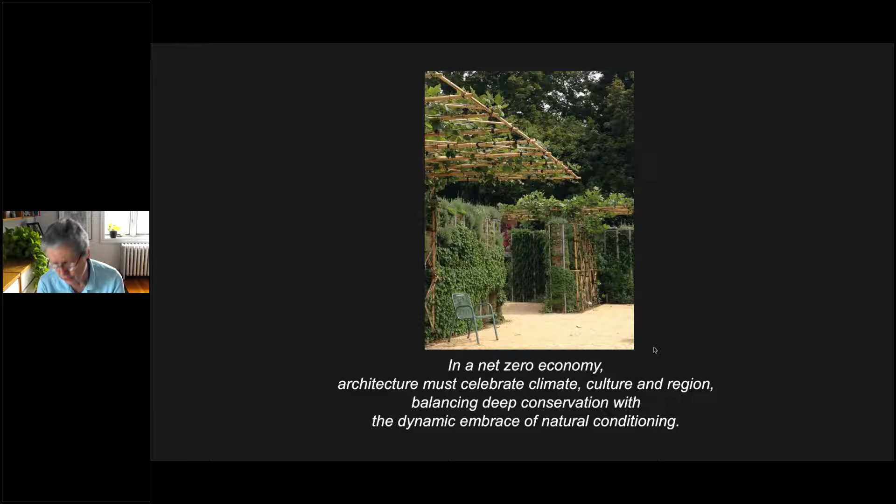These buildings lock in a chemical soup of materials and occupant activities with serious consequences for human health, from asthma to skin and eye irritations to reproductive health to cancer. And as all of you know, this has been untenable during the pandemic as a place to go to work.

Sealed and windowless work and living environments lock out the natural conditioning resources of passive solar heating, of daylighting, of natural ventilation, of passive cooling. These are nature's renewables, and they are the centerpiece of human health and environmental resiliency.

So I want to introduce each of them one by one. When we design for environmental surfing, we will maximize natural conditioning for as many hours and days and months as possible. This will be unique to each climate.

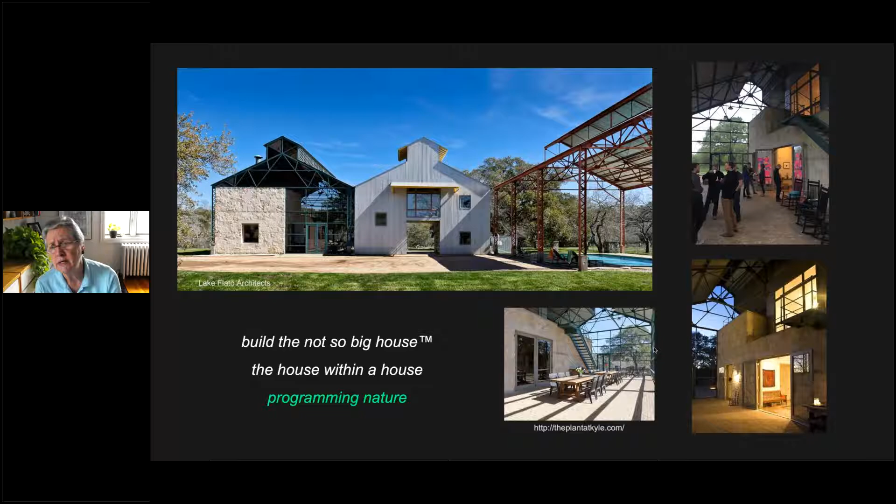It is a residential home with a pool and a dorm, so you can invite a lot of friends, and then the core house itself. Really an interesting approach to zoned conditioning instead of conditioning all spaces to the same level.

If we're going to do natural conditioning, we want to first design the core house for the climate that it's in. That means that if it's a very harsh climate, we're going to design it with a lot of buffer between us and the outdoors. But if it's in a very benign climate, like Hawaii, we're going to design it with a lot of outdoor living. And of course, most climates are something in between.

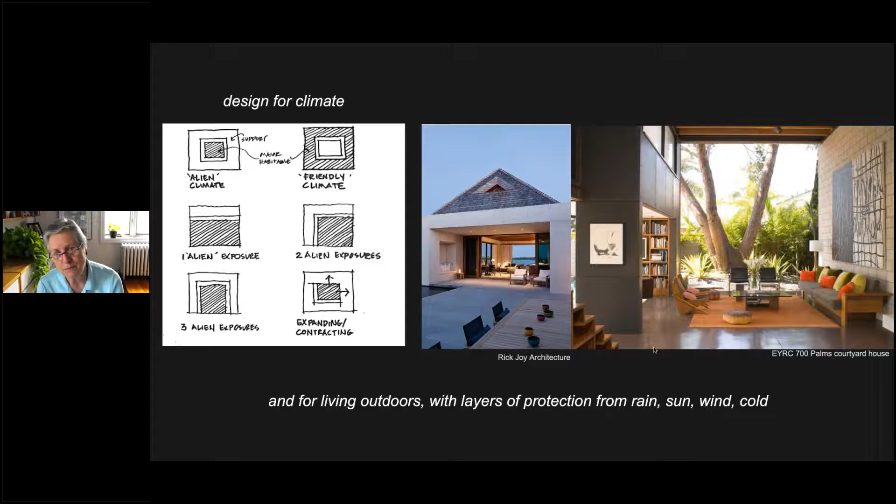So what we need to design is houses that expand and contract, or living spaces that expand and contract, where you basically have a core that you condition well, and expanding spaces that become a perfect spring space, a perfect summer, a perfect winter space with extended living. This project by Rick Joy gives you a sense of how beautiful these expanding, contracting living spaces can be. I fundamentally believe we should start taking every house program and breaking it into the parts that need to be conditioned versus the parts that may not need to be conditioned.

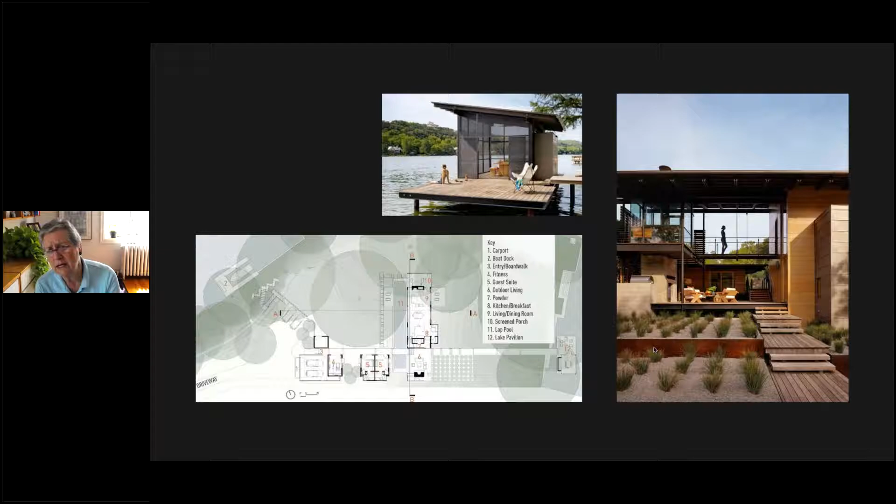We clearly will want to, in the harshest winter or summer days, have our living room, our bedrooms, our kitchen maybe, and some level of dining conditioned. But there are lots of other days where we want to actually extend outdoors into the landscape. So if we can start to think about how we design houses to embrace nature, maybe not in every room but in the majority of rooms, we've already done a huge thing towards resiliency and low energy.

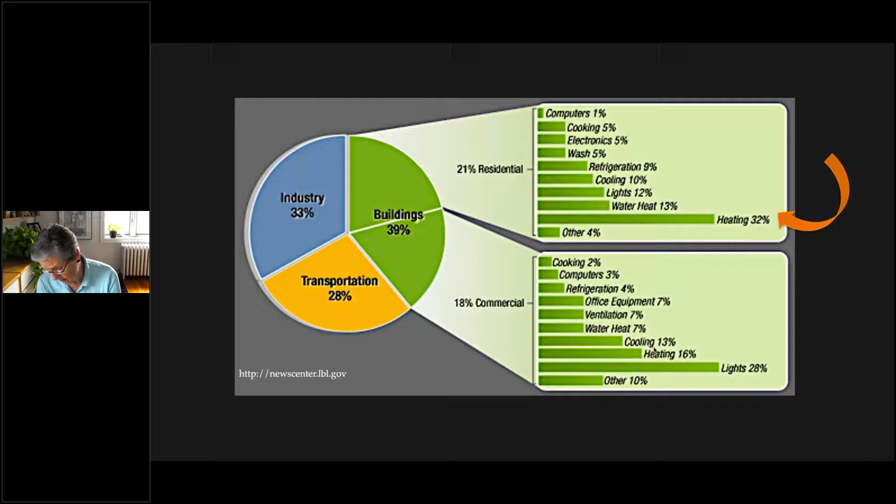Most people think the biggest challenge we have in energy is air conditioning. It is not. By far and above, the largest energy consumption in residential buildings is for heating, followed by water heating, then lighting, then cooling. So for us to turn all of our designs around as if cooling was the dominant force is losing out on the most critical free heat that we should environmentally surf for, which is solar energy.

Net zero buildings will free roll. They'll essentially, for 25 to 75% of the wintertime, have the heating system off. And for those of you with smart thermostats, you know the system just turns off as soon as the thermostat's temperature is met. If it's a sunny room that the thermostat is in, it'll turn off pretty quickly during the day. In fact, in my house, I usually have 15-minute cycles before the sun comes in which the heating system will turn on in the dead of winter.

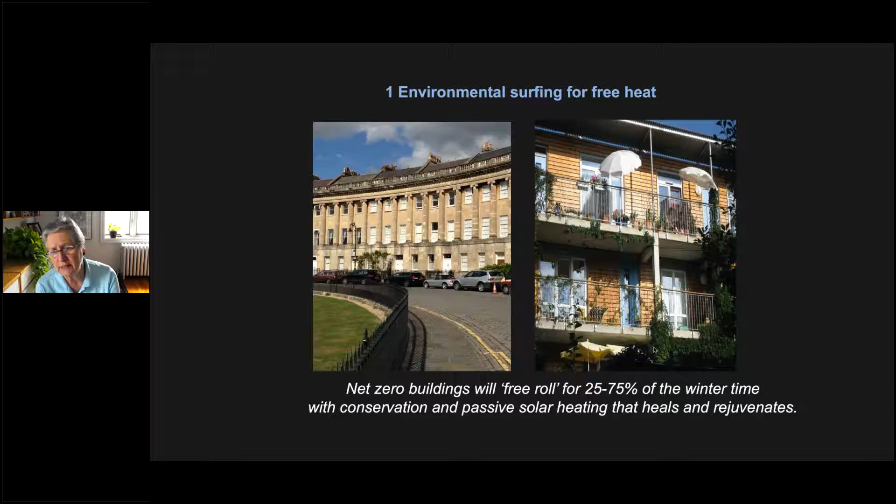If we do deep conservation, so passive house standards and passive solar, we can pretty much meet 75% of those large heating loads that we see across America. This is for commercial buildings, but it's very similar for residential. This is what we use and when we use heating, and the system is off from early May or mid-May until early September.

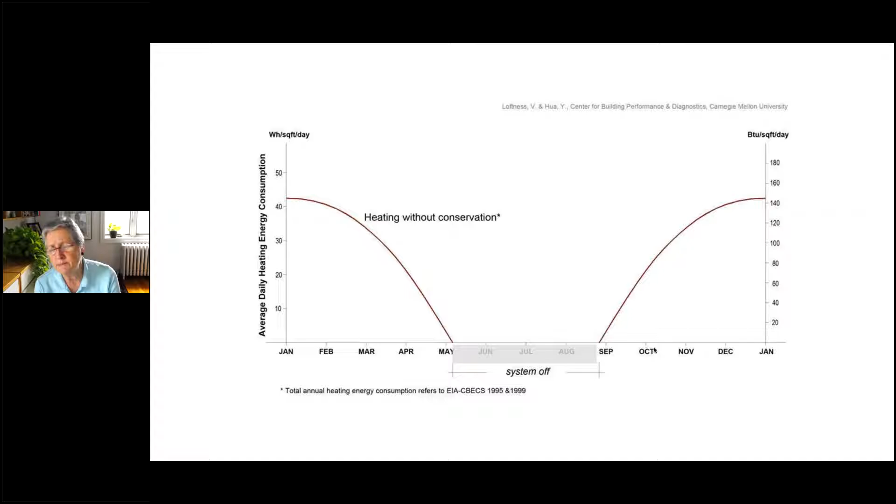If we do deep conservation, if we start to go towards passive house standards, we can turn the system off all the way from the end of March till the middle of October. And if we do that with passive solar contributions, we can get our heating down to 3 or 4 months. This is a dramatic reduction in the time in which we need to turn on the heating system.

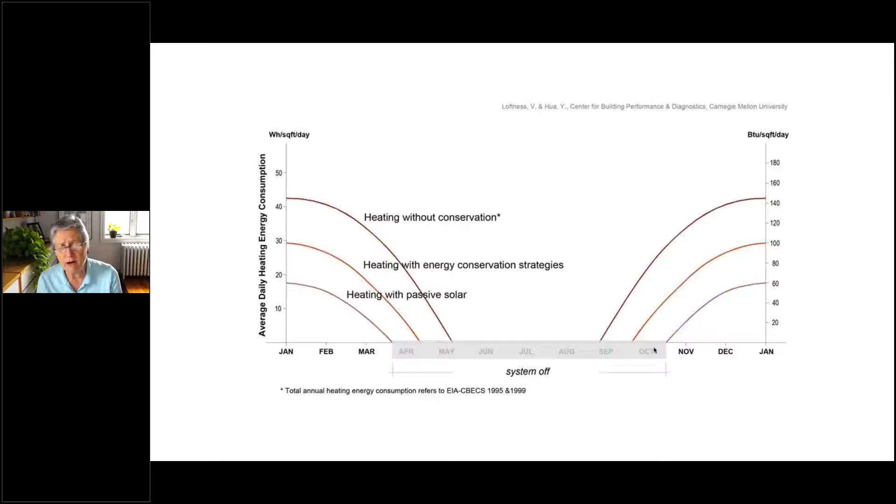It also is a time of resiliency. If the power went off anytime between the end of March and the beginning of November, I would be fine in my house if it was designed with conservation and passive solar.

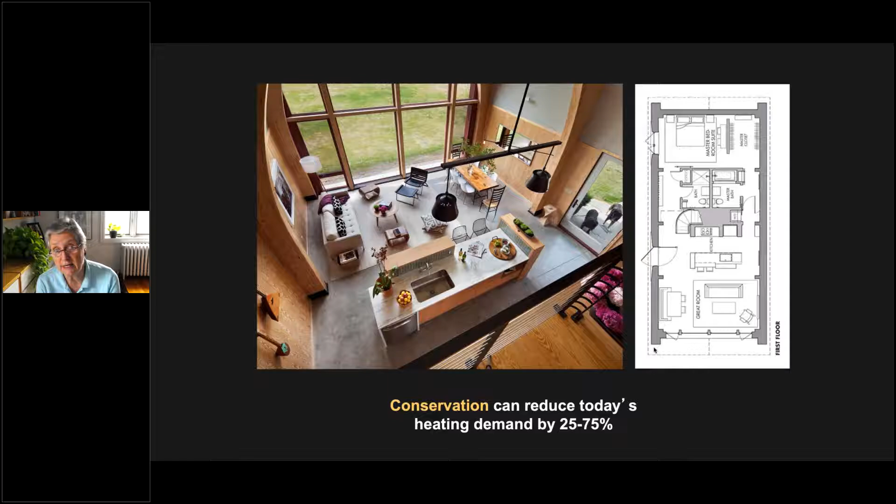If you want to look at houses designed around this, here's an example of a project in which the houses are super, super insulated. The windows are incredibly high performance, and it's very airtight. This is a house designed by Dennis Wedlick in upstate New York. It meets the Passive House US standard.

You can see the thickness of the walls, and you can see the attention to solar energy because the glazed facade is facing south. This house essentially uses a small percentage of what you would have in any typical house in upstate New York, but it has a much higher quality of life, and it literally is resilient. You could pretty much survive in this house with the power going out for a full year. It would get a little chilly in the winter, might get a little warm in the summer, but you would be fine.

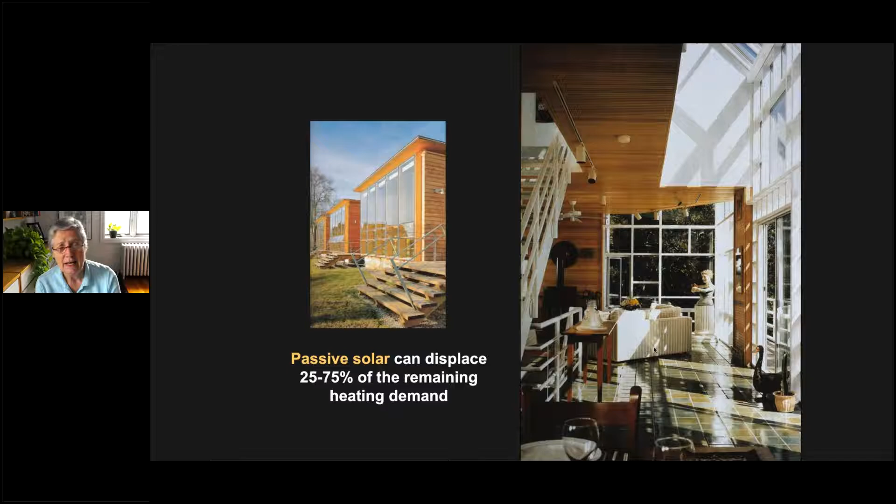Passive solar can displace somewhere between 25 and 75% of the remaining heating demand after we do deep conservation. That percentage range depends on whether you're in a sunny climate and how cold the climate is. If you're in a milder climate, you can meet the 75% with a lot of sun. And if you're in a harsh climate, you may only meet 25% of the load, but that is still a significant contribution.

The other value of sunshine is that it turns out to be a great sterilizer. It actually improves human health. There are studies done all over the world now to look at what value we have when sunshine actually hits the human body and hits the surfaces that we live next to.

This study by Choi in Korea looked at hospital rooms with sunshine and hospital rooms without sunshine, and found a 41% reduction in length of stay among gynecology patients and a 26% reduction among surgery ward patients when they were in the sunny rooms.

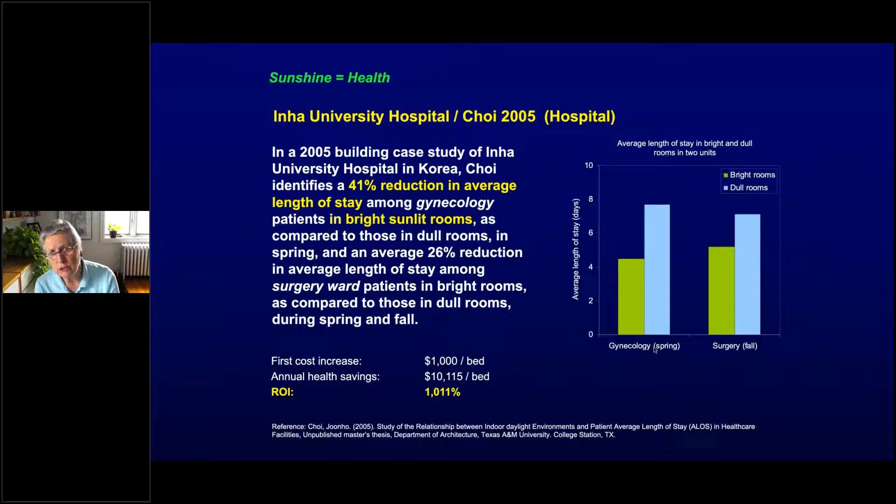Sunshine is a cure. It has a huge emotional and physiological benefit to people. So designing around sun is really a wonderful strategy. It also is a good sales strategy.

The second thing I want every home to do is to environmentally surf for light. It used to be that our rooms would borrow light from outdoors through transoms or from adjacent corridors through smoky glass doors, and now we just basically turn on electric lights. We need to design every room to use daylight.

Net zero buildings will be designed for daylighting as the dominant light source, and we will then rediscover the engineering and art of effective daylight design.

The church on the left is a Baroque church in Central Europe. It has no electric lights on. It predates electric lighting, and yet for the entire day, even in a very overcast environment, through very small apertures, it has incredibly effective daylight.

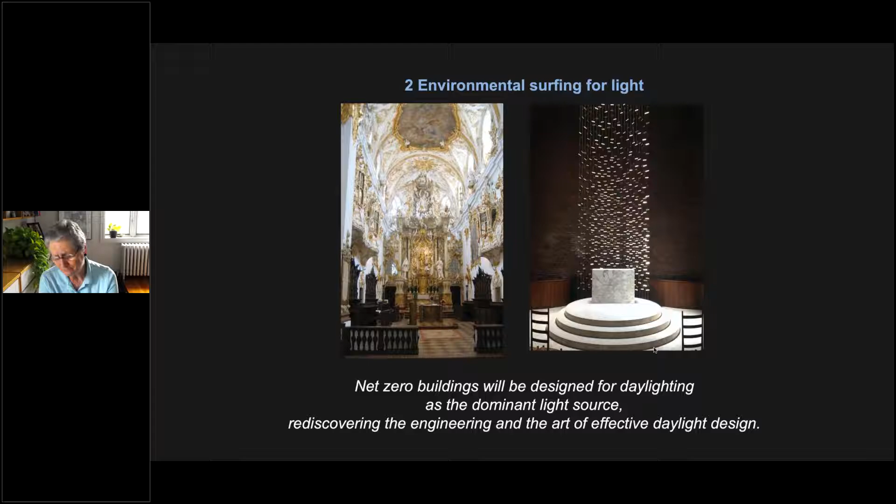The church on the right is on MIT's campus. It's an Eero Saarinen project, and it is a top-lit altar that's totally a daylit altar. And the spectacular nature of that daylight is magical.

This is how much lighting we use. Truly in residential homes, we use a lot of light as well. And there's still a pretty significant amount of incandescent and compact fluorescent light bulbs in our existing homes, and hopefully no more in our new homes.

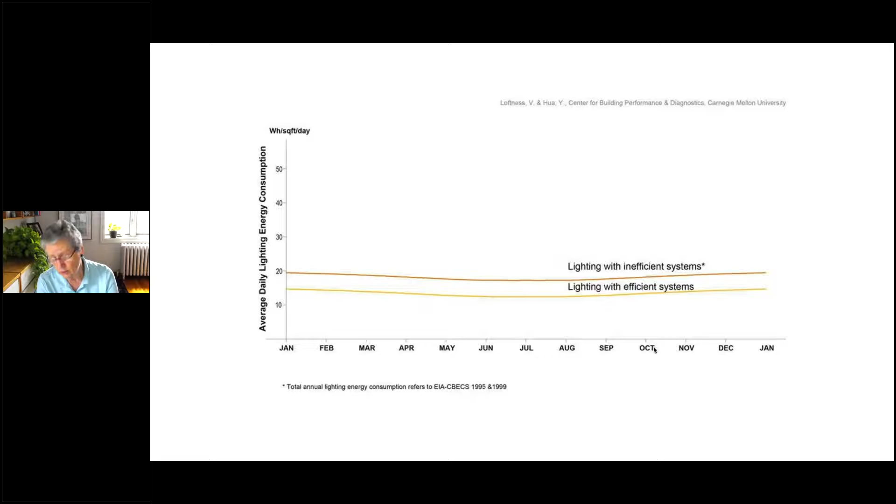Once we get lighting with more efficient lamp sources in them, we can cut the lighting loads by at least 30%, and in many cases more than 50%. But it's when we design around daylight that we start to see dramatic reductions in the lighting energy demands.

And when the buildings are narrow enough and every room has a window or a borrowed light window, all of a sudden the system can be off. You can occupy every room in your house when the power goes out during the daytime because daylight is there. It is a free energy source and it's abundant.

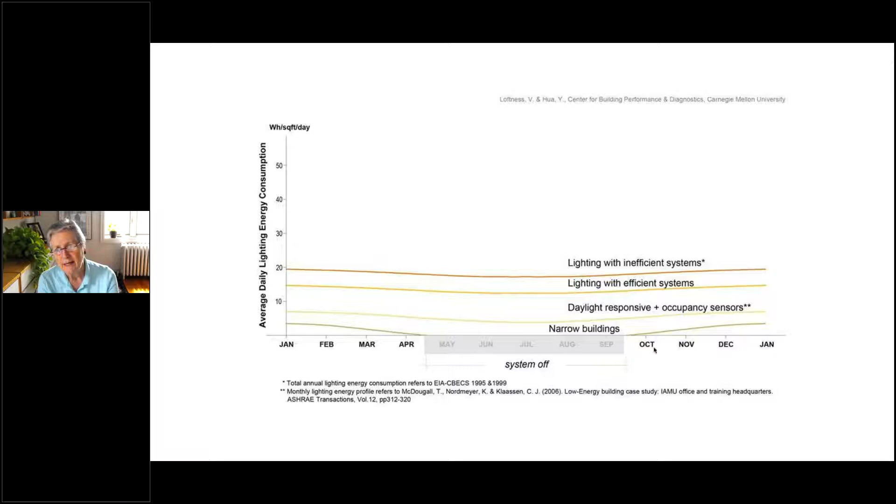And it also is a great sales reason. Nothing is more spectacular than walking into a room where daylight washes across natural wood and gives you this incredibly engaging sense of being part of nature.

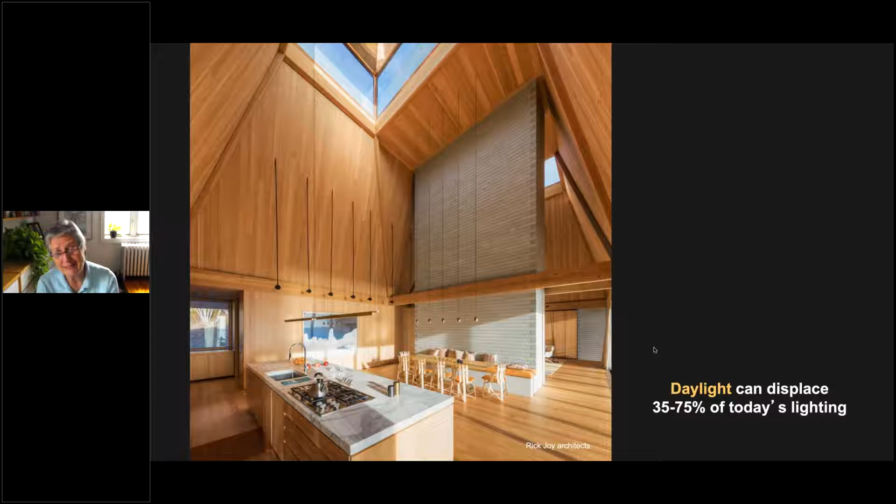Daylight can displace somewhere between 35 and 75% of today's lighting. That doesn't mean we won't have lighting. We'll come back to that.

In addition to the value of a daylit space, let me close the window, one minute. It's the one reason I have to close windows, right? Acoustics. Well, maybe when it's a little too hot, but right now it's really nice.

It turns out that daylight is critical to our sleep. A lot of the research has been going on at the Lighting Research Center in upstate New York at RPI, trying to understand how important early morning blue light and late afternoon red light, called circadian light, is to our circadian clock and our natural production of serotonin, a natural hormone that makes us alert in the morning, and melatonin, a natural hormone that makes us sleep at night. And it turns out it's critical.

We need actually the light variability that daylight alone offers us. Now we can artificially create blue light in the morning and red light in the afternoon, but if we've got daylight, why not just let daylight be our natural clock?

It turns out that for children who were put into orange glasses that cut out the circadian content of daylight in their classrooms, they had trouble falling asleep typically somewhere between 40 minutes and an hour and a half later than their peers who were not wearing orange glasses. Just getting light into our pupils is critical for our ability to fall asleep.

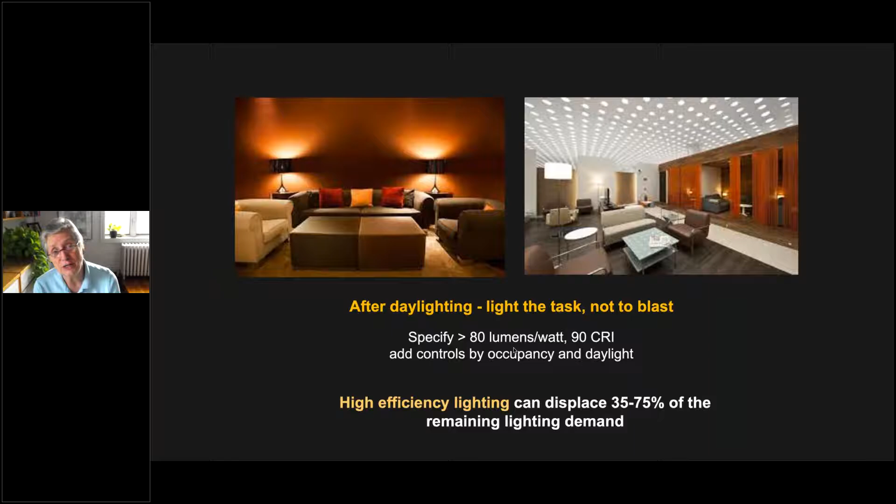After daylight, we've got to get the electric lights correct. We need to be much more critical to light the task and not blast light, and specify lamps with incredible efficiency—at least 80 lumens per watt or more. We need lamps with incredible color rendition, like 90 to 100 CRI, and provide controls that are occupancy driven and daylight driven so we're not overlighting spaces that daylight is already lighting for us for free. High efficiency lighting can displace 35 to 75% of the remaining lighting demand. So design for daylight, then design for very efficient and enhancing electric light.

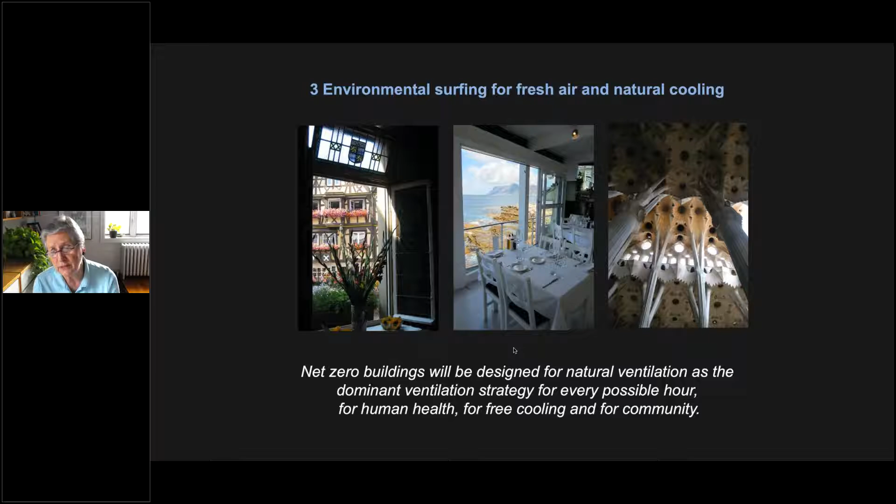The third environmental surfing goal is to surf for fresh air and natural cooling. Net zero buildings will have to rely on natural ventilation as the dominant ventilation strategy for every possible hour we can, to enhance human health, provide free cooling, and ensure we have connection to our own communities. Because if we design our buildings sealed, we lose that connection.

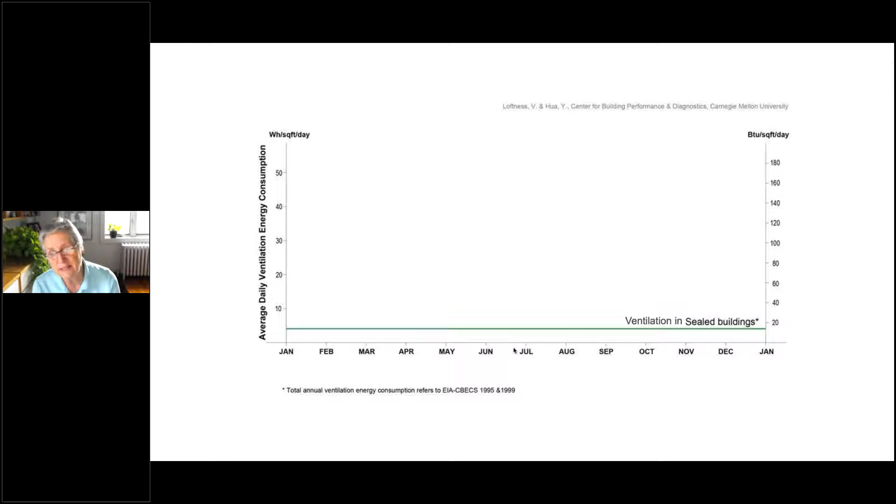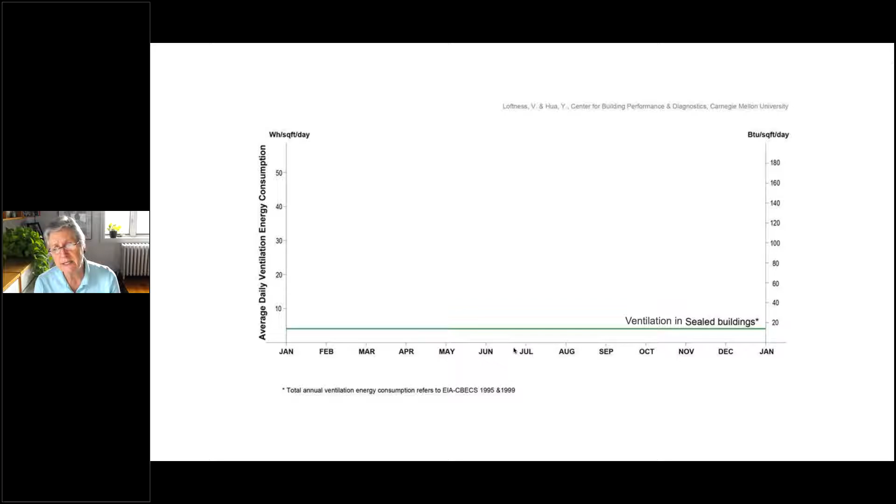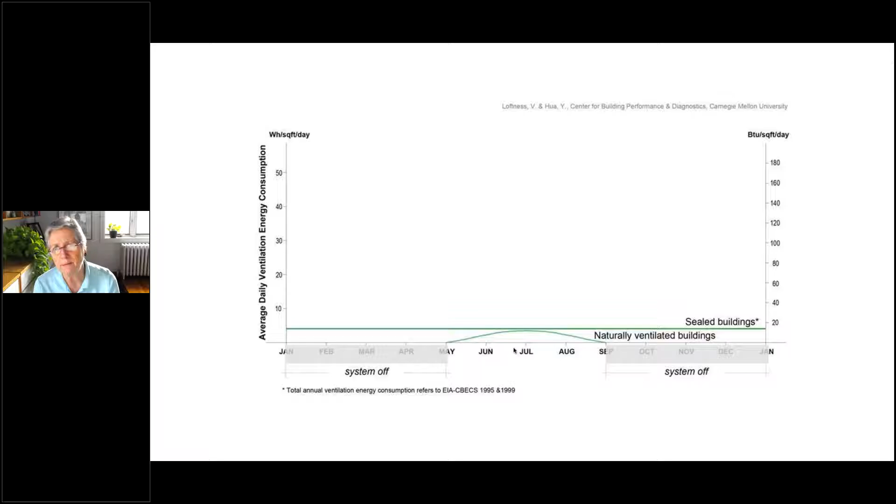For commercial buildings, ventilation is a relatively flat, consistent load that goes on all year round. For residential buildings, we've never had a tradition of forced ventilation systems, but as our buildings get tighter, codes are going to mandate that we install them, and the tendency will be to make sure they run year round. If we really can design to allow natural ventilation to pick up the moderate seasons, not the very hot summer, we'd be perfectly resilient from September through May. We'd probably need a mechanical strategy in summer because it just comes with too much heat and humidity.

Matched up to ventilation is your cooling demands. Air conditioning loads in some climates will run all year round, and in most climates it will pick up in May and go on till September.

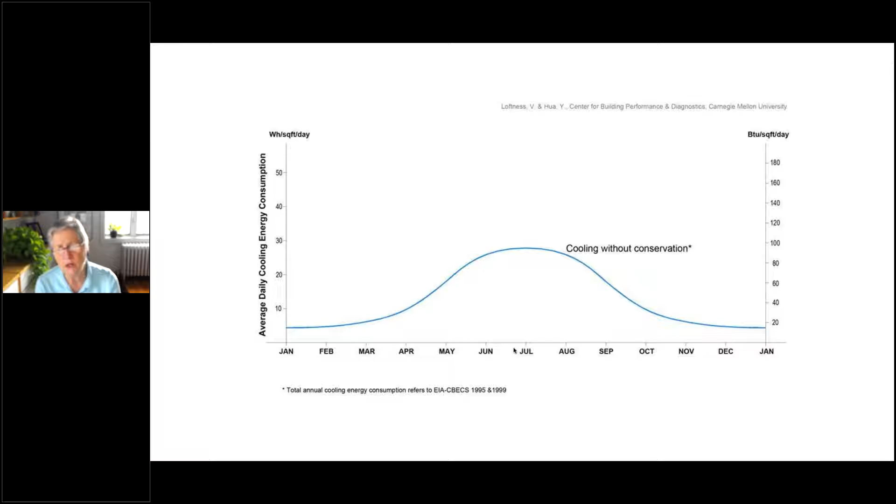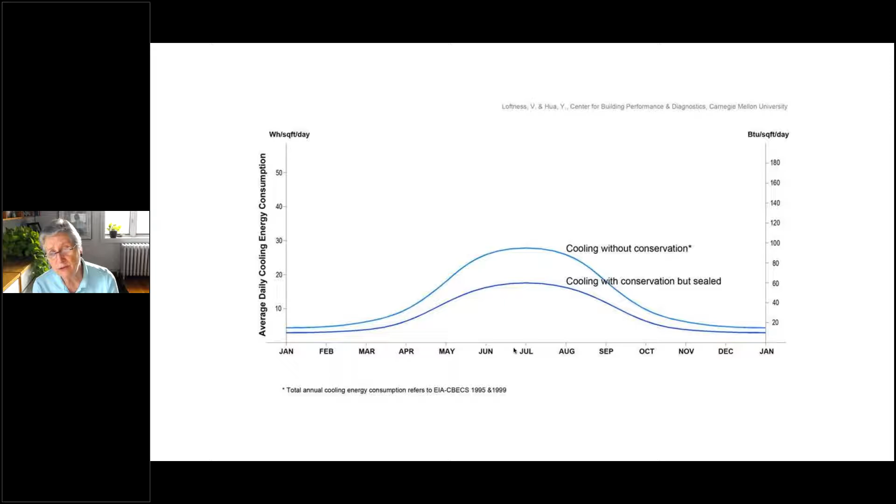If you design with conservation—shading your buildings, insulating, putting in the right roofing materials for reflectivity—but keep it sealed, you're going to be running all year round. You're just going to be using 30 to 40% less, which is good. Conservation is the first step.

But if we design to turn over the management of the building to natural ventilation through a mixed mode system, this means the mechanical system is designed to turn off when the natural system is capable of picking up the load. For those in the mechanical world, that could be an economizer cycle if we run it through the mechanical system. For those of us in residential homes, it could be just opening the window on a beautiful day.

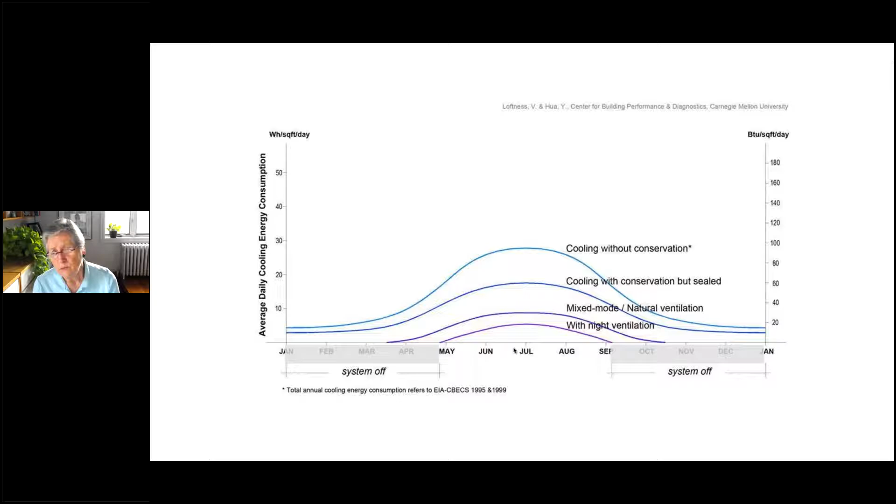If we do that with night ventilation, because night temperatures in many parts of the US are significantly cooler than daytime temperatures, we can get the value of free cooling and reduce the need for air conditioning during the daytime. So let's start with the conservation.

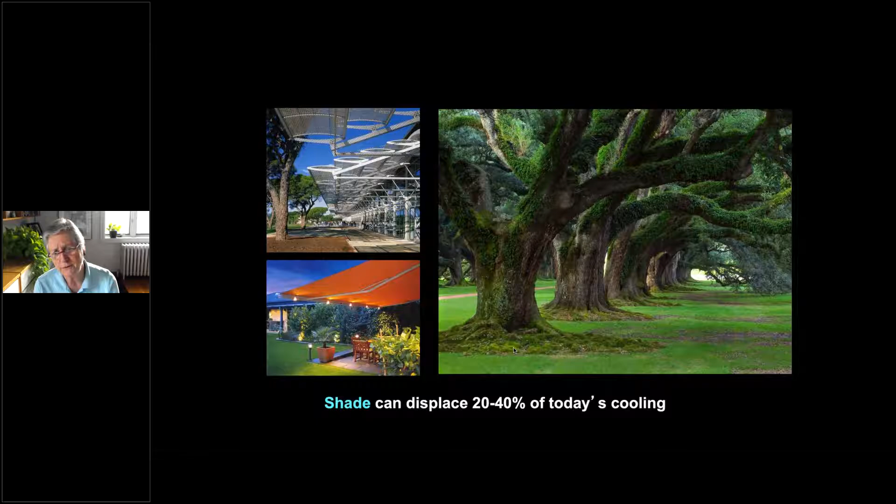The very first most important thing to do is to shade. We've got to shade every window, our roof decks, and our outdoor spaces because it's getting hotter. The sun is intense, and hard surfaces are very absorbent, putting a lot of heat into the atmosphere—we are part of the problem for why it's 2 degrees or getting closer to 2 degrees increase in outdoor temperature. Shading can be everything from trees and vegetation to overhangs to canvas awnings. Everything you can incorporate into your designs for shading, including internal shades on some sort of PV automation, is absolutely invaluable to reducing our air conditioning loads and providing comfort.

Sadly, at the moment, our homes are very poorly shaded and becoming increasingly sealed. I see far more sealed sash windows going into residential homes with very small operable components on the side just to meet code. That's the antithesis of what we want to do. We want large operable components so we can live outdoors and enjoy a breeze at night.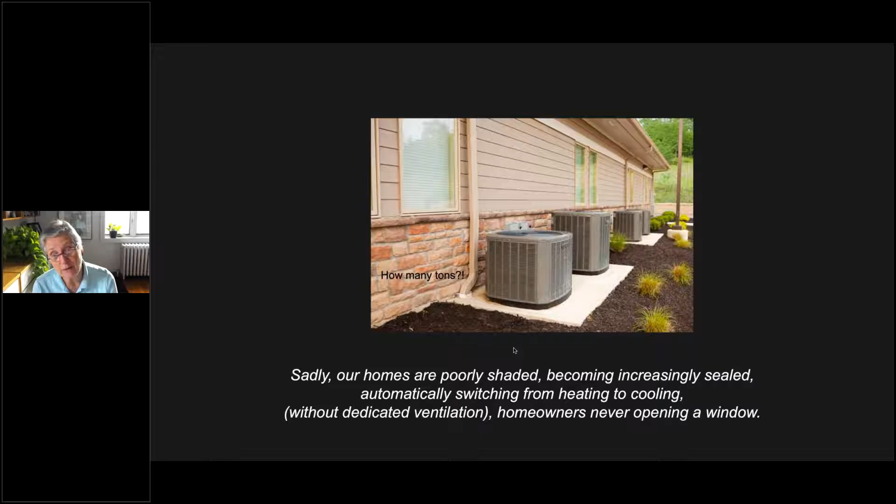I live in a home where my dining room looks like this - I can open the entire wall of my dining room. I don't have a nano wall, which is probably the most elegant solution, but I do have French doors from Pella, which are breathtaking on a beautiful day. Every morning pretty much is beautiful in Pittsburgh - it gets hot in the afternoon, but mornings are perfect. So we open up and sit essentially as if we're outside, or in some cases we just move outside.

Natural ventilation can displace somewhere between 20 to 40% of the cooling load. I wouldn't need to air condition until about 10 or 11 a.m. in Pittsburgh, and then I can turn it off again at about 8 p.m. And it displaces 70% of any ventilation requirement if we start to ventilate all of our new homes.

Does it matter to our health? Yes - there's a lot of research showing that people who work and live in naturally ventilated environments have much less absenteeism and far fewer doctor visits - like 16% fewer. They have a 35% reduction in hospital stays. This is a big deal, it makes a huge difference. And all of us now in the COVID era have begun to realize that natural ventilation, through dilution, is one of the ways we can reduce exposure to infectious diseases.

One or two other ideas I want to put in front of you in terms of environmental surfing that are very climate specific. For dry climates, on the left, is the use of night cooling and thermal mass. For diurnal climates is the use of earth cooling. Both cool nights and cool earth are incredibly important strategies for reducing our exposure to high and low temperatures, using nature as a natural conditioning system.

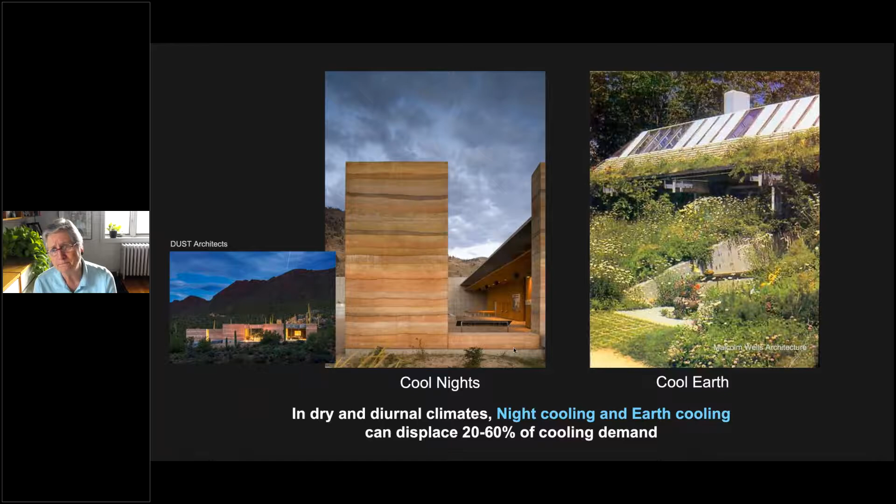Windows matter. Really, anybody in the passive house community knows that the first thing you do is specify the windows - they have the longest lead time, and they're the most critical decision you make. You want the highest R-value you can afford, and you want to make sure the windows are designed to connect you to outdoor rooms.

I want high solar transmission glass. I have an ongoing debate with the EPA folks who keep putting out standards pushing low solar transmission for anything but northern climates. I'd argue that even in Texas, you're going to want that sun in December, January, and February. So I want high solar transmission on the south, but low solar transmission on the east and west, because those are very problematic, summer-intensive suns.

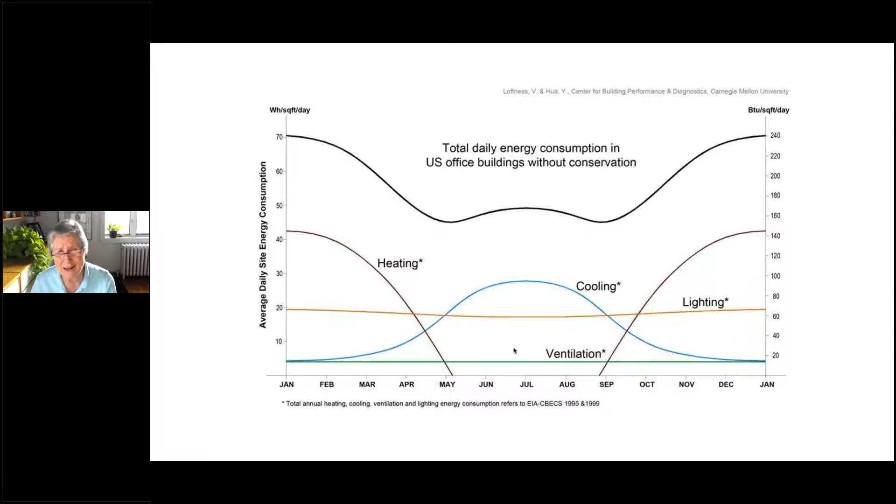We're using a lot of energy. We use it to heat, to cool, to light, to ventilate. This is our conditioning energy. I'll come back to plugs in a minute. And this is where we could be if we just did environmental surfing, deep conservation, passive conditioning, or environmental surfing for heat, light, air, natural connections. We can bring it down to this level.

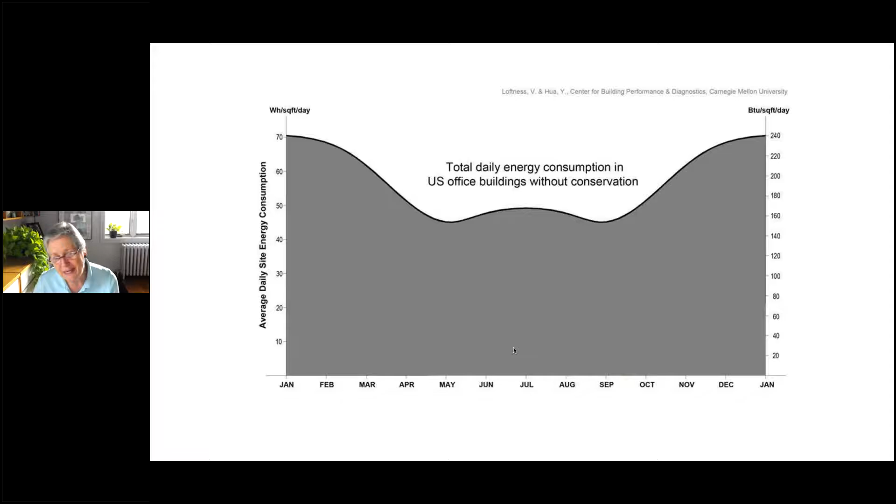In most cases, we do connect to the grid. We don't battery store it in the house itself. So we use the grid as our backup, but we're essentially achieving net zero. And the more the residential community can achieve net zero... the residential community is 20% of the total US carbon problem. And if we could get our new construction to net zero, we could easily get down to 10% of the US carbon. We could take 10% out of the equation through residential investment alone.

But wait, I need to talk about the plug loads, because this house here can be net zero unless people start to put a lot of energy intensive technologies inside. So we've got to pick our technologies and our control systems to be low energy, to be able to be supported by a small generator backup. So we have a core plan for when the power goes out after a major hurricane, we can run all of our core services and know exactly what those are.

And they're typically going to be your refrigerators. They may be your cooking. They may be communication. So we're literally starting to look at what's our core and how efficient can we go. We absolutely need to specify Energy Star for all appliances. We need to have a handle on plug loads, and we need to embrace innovative control.

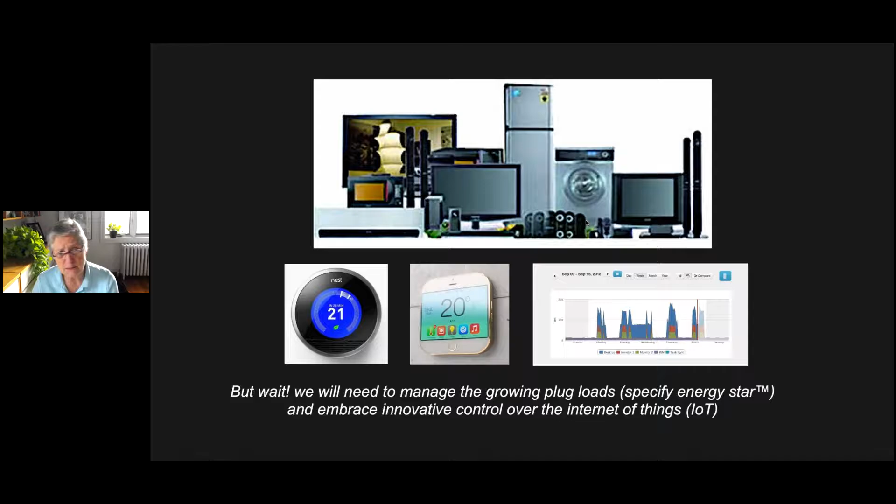I want to end with a few other things that we can environmentally surf for besides heat, light, air, cools, and power. We can environmentally surf for water. Residential homes have the potential to eliminate the use of potable water for landscape. But to do that, we have to actually capture site water and roof water and store it for landscape, and we have to design landscapes that use much less water, that are indigenous to the region they're in.

So if you as a building owner, designer, and developer start to think about collecting all the water on the hard surfaces on the site and on the roofs and finding a way to store it, then trickle feed the landscape and choose landscape that has very low water demands in that region, you can actually eliminate 50% of the water demand in America's homes used for landscape irrigation, at least in Denver, as an example.

We can also regenerate our water supplies, because what we're doing is infiltrating the rain back into the natural aquifer, rather than running it off into some storm sewer and having to take it back to be processed in a water processing system.

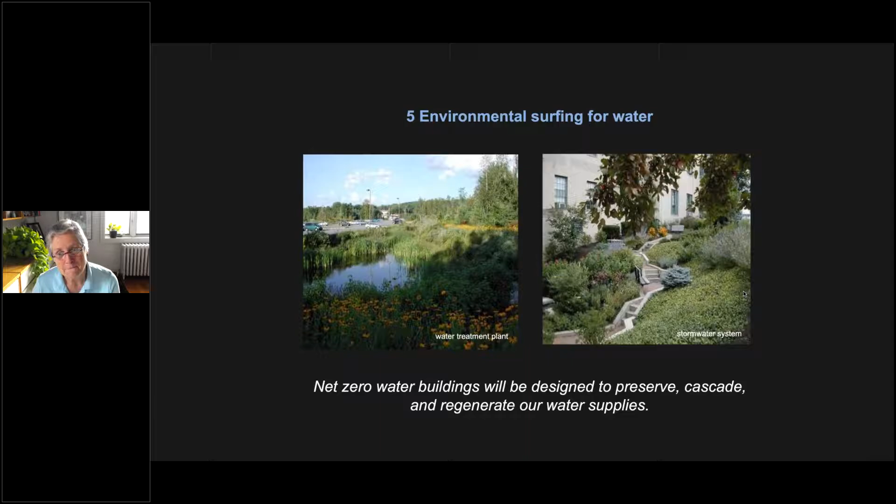Rainwater regeneration can displace somewhere between 20 to 60% of today's processed water. We still need potable processed water for drinking and cooking, but not for a lot of other things. We can use gray water and or rainwater for a lot of things we're using processed or potable water for, and it makes for far more beautiful side yards and sidewalks.

There are entire neighborhoods designed around water. Dockside Green in Victoria, Canada, is the most beautiful residential neighborhood I've ever visited, where all the rainwater and gray water are managed on site through a sewer system that serves an entire region. They got their housing development redistricted as a sewage destination and got the city to invest in all the water infrastructure because they manage sewer for a much larger catchment area. They do gray water, rainwater, and black water management in a beautifully articulated set of canals directly adjacent to people's terraces. It's a community that realized by becoming the water, sewer, and waste heating authority, that's how they paid for the quality of physical space.

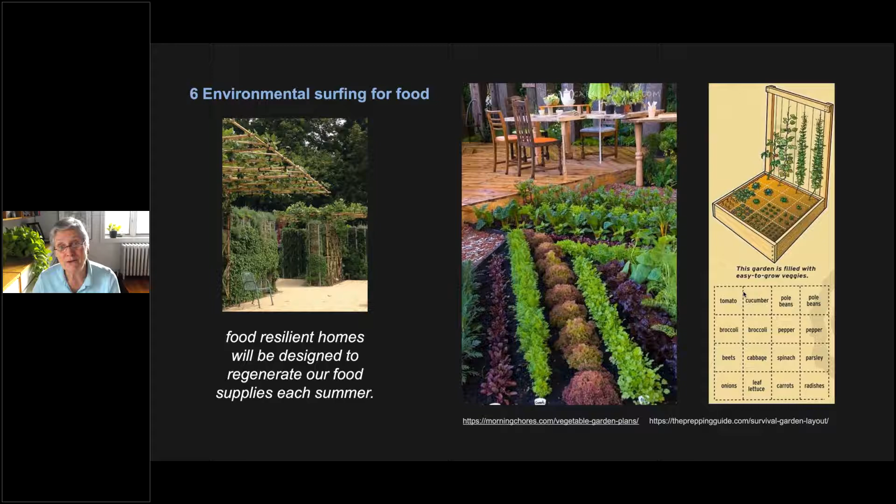Then we can environmentally surf for food. We can design food resilient homes where people can actually grow food, at least in the summer, and store it, so we design for storage. We can make food part of the actual landscape of choice, with easy to grow vegetables and quality of experience for you in a residential home.

I've had a master's student analyze how much food we can grow in an acre or half an acre. It turns out on the Brooklyn Grange roof in Queens, on less than an acre, they're able to grow 7 tons of food, and we were able to quantify that.

Here's an entire community in southern France, residential homes designed around both work and food production. It's a utopia community called Arc-et-Senans. It was originally planned to be a whole circle, and it's 2 centuries old, but it's an amazing idea about how food can be integrated into housing.

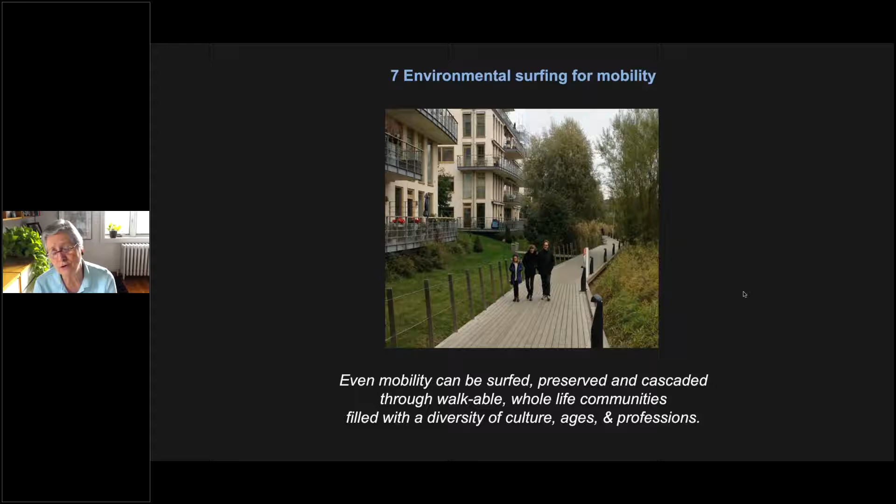And then the last is environmental surfing for mobility. Even mobility can be surfed, preserved, and cascaded. You can make walkable whole life communities filled with a diversity of culture, ages, and professions, and still give provisions for transit and vehicles. If we design for walking, we can displace somewhere between 25 and 75% of our car trips.

There's an incredible story about the state of Pennsylvania having 7 parking spaces for every car. Why would there be 7 parking spaces? It's because that's how many spaces we need in our typical week to park our car just to get through our weekly needs: a space at school, a space at the library, a space at church, a space at the shopping mall, a space at the exercise or recreational center.

We're literally replicating, and all of that pavement is causing huge heat island effect and storm runoff effect. So if we start to design for walking, we can displace a significant percentage of the car trips.

This particular neighborhood called Vauban in southern Germany is designed for walking. They actually became the transportation authority. There is a light rail that goes to the community. You're allowed to bring your car to unload, but you can't leave your car. You have to take it to a structured garage, and the streets belong to the kids and to the people who live on those streets. It's just a spectacular neighborhood.

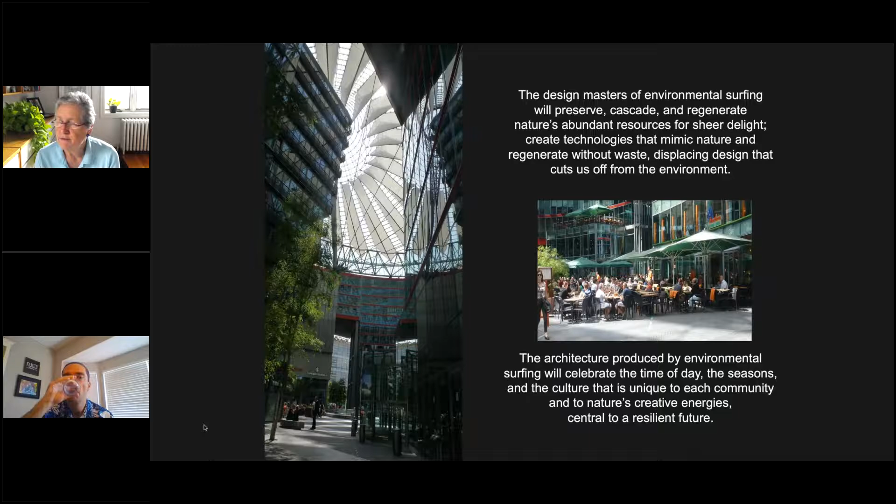I would suggest you go to the AIA Committee on the Environment Top 10 Awards, the AIA COTE Top 10, and type in affordable housing. What has impressed me is the number of affordable housing projects, many of them in California, Washington state, and Texas, that have managed to do incredibly energy efficient and environmentally sustainable projects that are affordable. A lot of it has to do with creating community and privacy, because one of the challenges in affordable housing is that people need a place to get away and not be seen, but they also desperately need a sense of community. So they really have been designing for that.

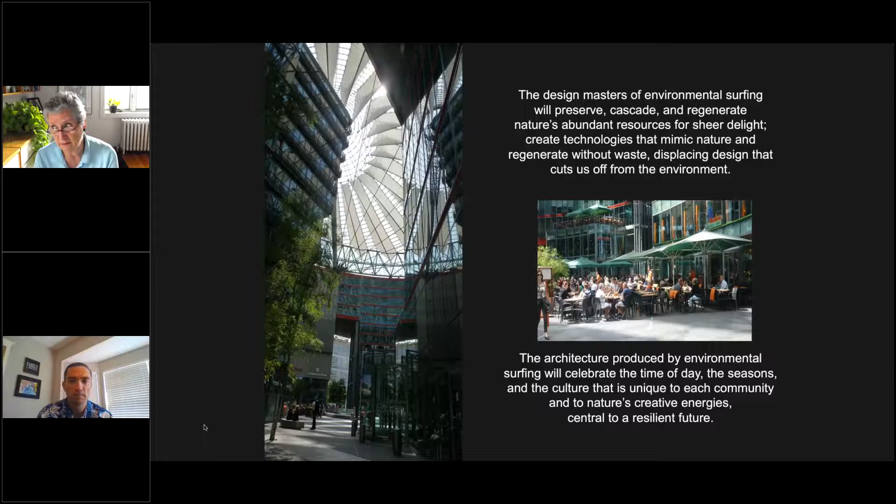I didn't put in a picture of some of the tiny house projects dealing with homeless populations, but a few regions have established legislation that allow people to put tiny houses behind their house as a way to provide housing for homeless. I've seen some amazing videos of, I think, either Portland or Seattle residents who've agreed to put a tiny house for a homeless person in their relatively deep backyard and made lifelong friends - people that have really enhanced their quality of life. They did it out of commitment to humanity and a desire for their kids to understand diversity, both economic and ethnic diversity.

I had a question for you as well. Early on when you were talking about solar gain and being able to heat and bring in light - is it difficult to meet certain energy code requirements with so much glazing?

Okay, let me just go back to this house. Let's take the Yannell house by Doug Farr. As you can see, there's quite a bit of southern glazing here, and it's a combination of a desire to allow for a lot of airflow through the space, but also to catch a lot of sunlight.

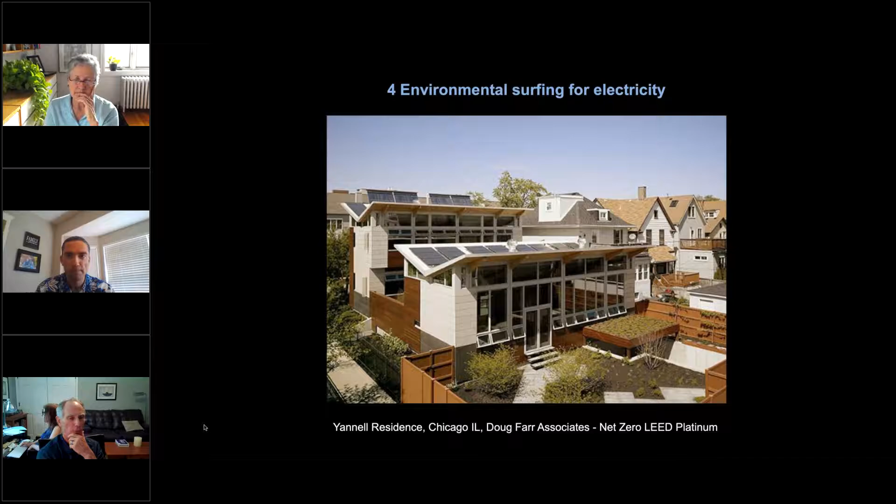I'm going to chime in because I'd love your feedback on a question I have. On this design, I have an issue because I always consider butterfly roofs a design defect. Roofs are designed to shed water, not supposed to collect water. Am I wrong, or how do you see this? Because I always struggle when I see designs with butterfly roofs.

First and foremost, a roof has to shed water. That's its purpose. I'd suggest that a flat roof is your most dangerous roof. Your butterfly roofs, especially with leaf buildup and snow buildup, you could end up having some serious concerns. This clearly is designed to catch water. They're actually trying to do on-site water catchment to store for landscape irrigation, right? So you have to keep it clear, and that is an issue.

You can't be lax in your guttering. The guttering would be oversized and very well detailed. I wish I could have Doug on the line to answer this question about what detailing he put in there.

You'll notice, by the way, there are rooftop ventilators in there, and those are ways to induce airflow. You see those little spinners there, two of them on both roofs. Those are the kinds of spinners you see on a lot of barns throughout the Midwest, Pennsylvania, and other states. It doesn't matter which way the wind's blowing, they start to spin and pull suction, inducing airflow. You'd want to cut them off in the winter because you don't want to induce airflow then. But as soon as it gets warm, you'd open the damper on those ventilators and it'll pull air right through your space, so you enjoy a natural breeze, even in a high density urban environment like this one.

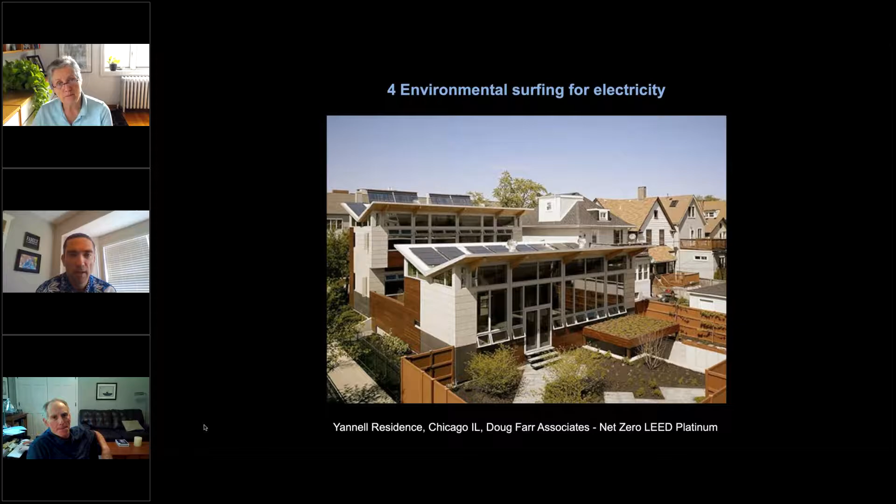We were talking about water earlier, and we had a question come in from Robert. He was referencing the Vancouver housing project you were showing, and he asked if water retention outside units creates an untenable mosquito problem, because that would prohibit him from going outside during typical mosquito seasons. Can you talk a little bit about that?

Yeah, I had the chance to go and visit Dockside Green, which is why I have photographs of it. It has actually a pretty substantial fish population, and it is a fishing destination for a lot of residents. It's right adjacent to a bike path that goes all the way into downtown Victoria, about a half a mile or 3/4 of a mile away. You'll notice there are also ducks in here. It is considered an entire biome.

It's really designed to keep the mosquito population down by having fish, which are very effective at keeping mosquito levels down. I do not know if this is gray water that's been processed, or if it could have been black water that was processed and then turned into creek water. It's a continuous body that is flowing, not stagnant.

Sam was just on here, and he may pop back in when I ask this question. We've talked in the Housing 2.0 workshops about solar production, and Sam's more a fan of it being on the roofs of porches as opposed to the roofs of the structures. My question to you, Vivian, was you had earlier talked about shading and how important shading is—but does shading in some ways conflict with solar energy production?

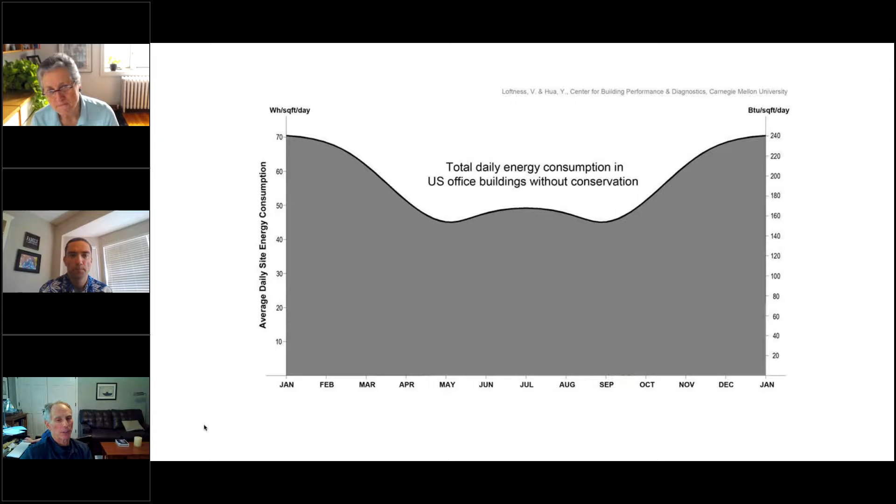PV will become less income regressive under utility ownership, then everyone would get it. Right now, I think it's really skewed to very high income households, you'll see it on homes, so it's maybe not such a bad idea.

Yeah, I think we're going to start to see glazeless solar systems, where metal panel roofs are able to capture heat through innovative layers. There's a lot of innovation occurring, certainly on the heat side if not the power side of the equation.

Just a couple of overriding messages: if we can start to design the house within a house, strategically thinking about what spaces actually need to be air conditioned and/or heated for long periods simply because that will make life enjoyable and safe, versus how many spaces can we slowly peel off and locate in the most benign climate location to extend our living space whenever the temperature is mild, including outdoor rooms as part of that.

If we can start to rethink the way we design our programmatic spaces, we could dramatically reduce the load and provide much greater comfort. So you have an inner zone that's super comfortable when it's really hot or really cold outside, and then special zones, some on the south perfect for a cool sunny day, and some on the west perfect for a breezy, overcast summer day.

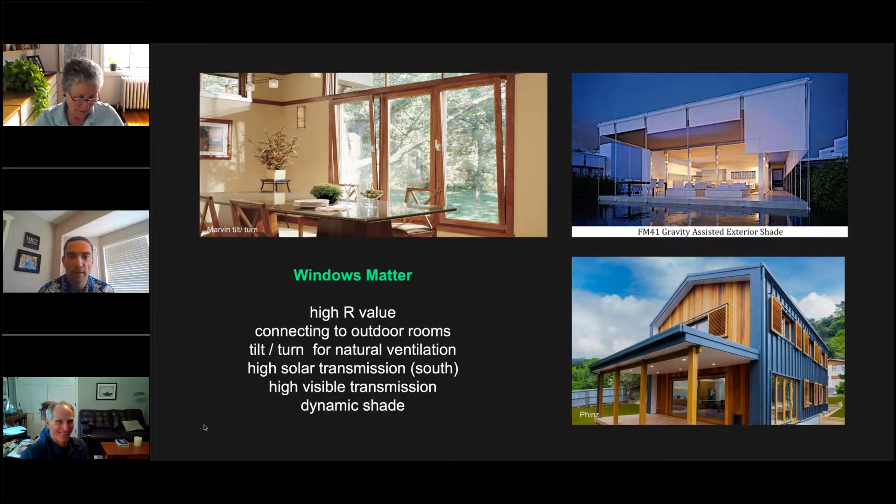We had a couple of questions on the topic of natural ventilation. The first one was from Elizabeth: does natural ventilation work in high humidity areas?

Absolutely. In fact, traditional housing in high humidity areas only used natural ventilation, but they always had stack ventilation assist. If you look at Charleston, South Carolina, all the traditional architecture there predates air conditioning and is designed to maximize airflow through the spaces. It included having rooms with beds that could roll out onto a sleeping porch, and the sleeping porch was completely screened in. The screening material has gotten so elegant these days.

You can create a screen porch that almost feels like you're seeing right through it. The ability to create that sort of screen porch extension means that you come home from work and can sit on a screen porch, and the breezes from all directions just go straight across the space. You're sitting in nature, with the trees, which is just fantastic. So I absolutely believe it can be done with humid environments.

Now, can I run air conditioning while I'm letting a lot of humid air through? No, because the air conditioning will condense on all the surfaces if you let humidity into the occupied space. This gets at the question of a room within a room or a house within a house. If I need some spaces sealed and air conditioned, I'm not going to naturally ventilate them while the AC is running, unless I have a dry air system. If my breathing air system is desiccant air and I dry the air, I could probably run cooling to a moderate temperature. But if you run air conditioning while the windows are open, you'll get condensation on surfaces, which is not what you want.